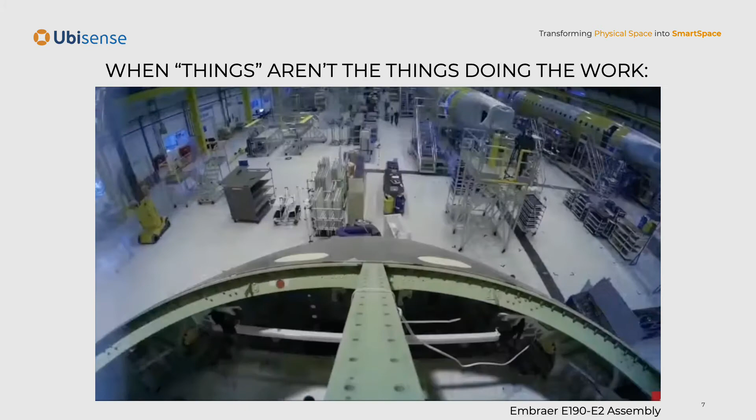But what I'm talking about here is: is IoT really going to revolutionize manual processes? So we look at manual processes and look at a situation where the things aren't the things doing the work. It kind of looks like this. This is the Embraer E190 assembly plant.

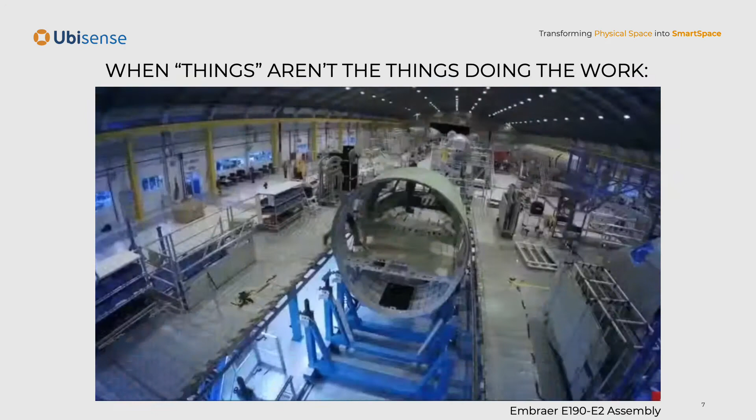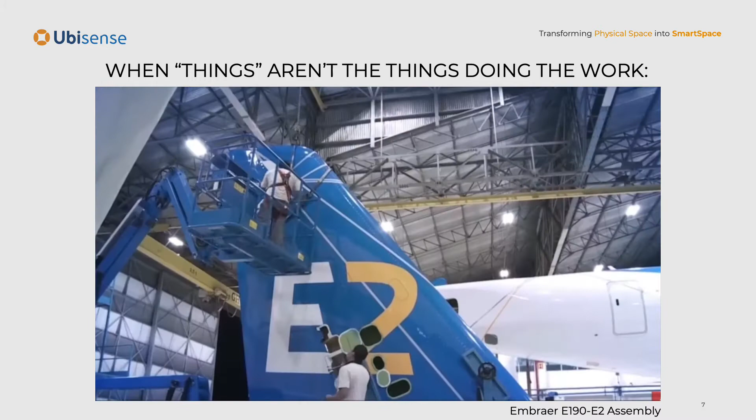And what is happening here is a lot of manual process, almost entirely manual process, including the guy driving the crane, right? There's a lot of movement, a lot of interaction, a lot of people. There are parts and tools and the product itself and the stands and just an inordinate number of moving parts that have to be synchronized in order for the process to work. And that's very different from an automated process.

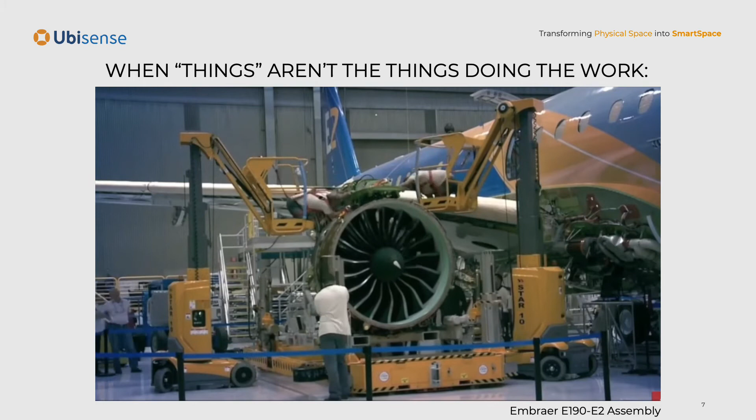So here, in a manual process, the status of your process is not defined by the aggregated state of the machines. There really aren't that many machines. The state of your process is defined by the complex series of physical movements and interactions of people and tools and parts and products. And IoT doesn't see that activity. That's where IoT is actually blind. And so IoT does not have what I defined earlier as sufficient understanding of manual processes. It just doesn't see all those important bits.

So if we have a look at a picture, you may actually have devices in your manual process that have some IoT connectivity. Your torque wrench may be feeding back torque results, and your forklift may be sending its state and state of battery charge and so forth. And whereas that's interesting, it doesn't define the entire process. The state of the battery on a forklift doesn't tell you whether it picked up the right load. Is it going to the right workstation? Is it taking the right route? Is it on time? All those things are about motion and interaction.

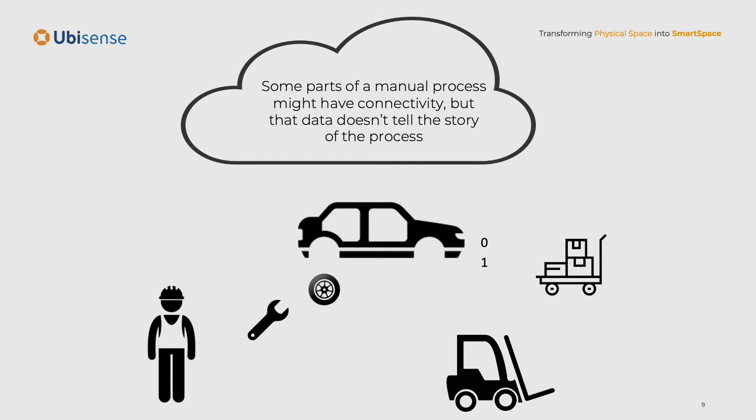And the reason is the process flow in manual process is really very complex and interconnected. Right? We're not moving through, let's say, a gear manufacturing process where we go through the grinding and hobbing and deburring and then heat treatment and then final finishing and polishing. That's a very linearized thing where everything happens inside the machine. In manual processes, we're talking about situations with a lot of interaction and moving parts, as I said before.

And that thing is called spatial intelligence. It's how you extend IoT into manual processes. If you think of the IoT as the Internet of Things, you have to add this Internet of interactions, effectively, the digitization of all those moving parts. And that can be done. And it's done in layers, and let me explain the layers.

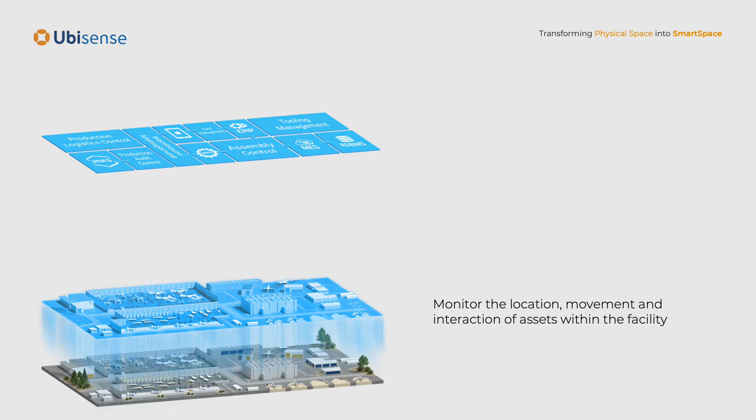So that's the first thing, location sensors, and there are a variety of different technologies that apply in different cases. But once you have that, it's a huge amount of data, way too much to really process yet. You go to the next level, which is to say, look, out of all that data, a lot of it's not very interesting, actually. Who cares about the location of a tool sitting on a bench? What I care about is a tool moving into a workspace or into a process zone in a product.

So the next level is to take all that data and turn it into events. And that requires a spatial model, and this is where we get into what I mean by spatial intelligence. Here we have to model the plant not in terms of objects and walls and conveyors, but here's a workspace and there's a workspace and here's a storage space and here's a kitting area and so on. So when we draw those geofences, we can pull out events like this product has just entered inspection cell 3. This part has just been delivered to dock door number 5. So those are events, those are the things we care about, and now we have a very structured set of data that is telling us what's going on in the process.

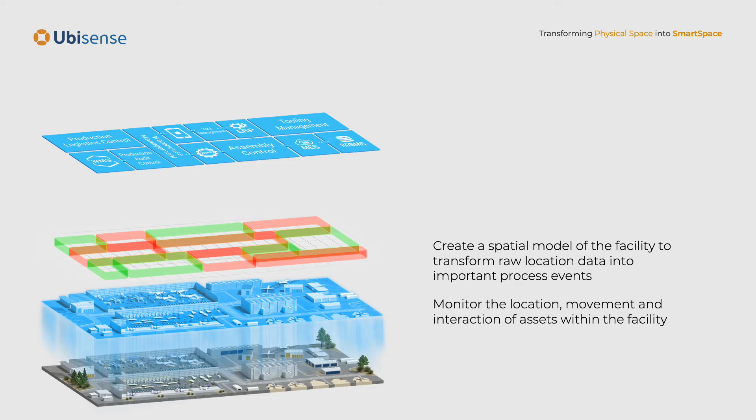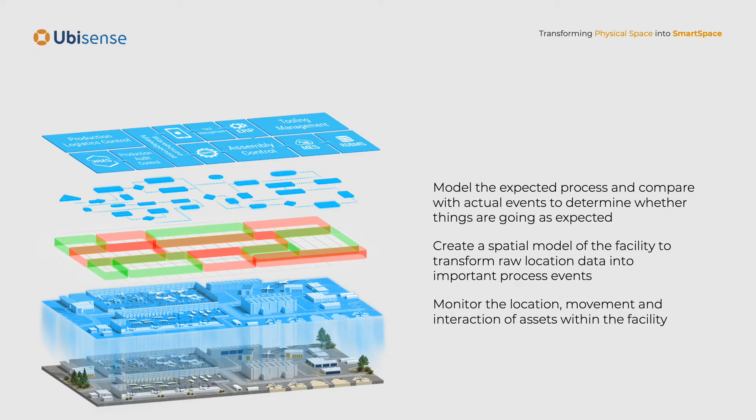In fact, what we've developed there is the spatial intelligence part of the system, but there's one more level which starts to add on top of that the true business value, and that is a logic layer which enables you to program this platform with what is our expectation, what's the plan, what does good process mean, what is supposed to happen. And with that model in there, comparing with the real-time events, you can start to detect issues and anomalies and communicate those up to the cyber part of our cyber physical system, the digital systems. And that allows our digital systems to get a view of what's going on, what's going wrong, and gives them the real-time ability to react and compensate for processes going off plan.

It also has digitized the entire process, and now that the processes are completely software defined, it also gives you a huge amount of flexibility in how those processes should run. So once you've been able to communicate those issues and errors up, that allows either digital systems, or more commonly people, managers and supervisors, the ability to intervene and correct. It keeps everything flowing exactly on plan.

And we've taken from the bottom this giant complexity of manual process, digitized it in the blue layer, in the next layer up, pulled out the important events that we care about, in the next layer up, monitored those events for which ones we really need to pay attention to, and then communicated up to the systems or people that can step in and make a difference. And that level in the middle there, those layers of digitizing the process and monitoring against plan, that is what I mean by spatial intelligence.

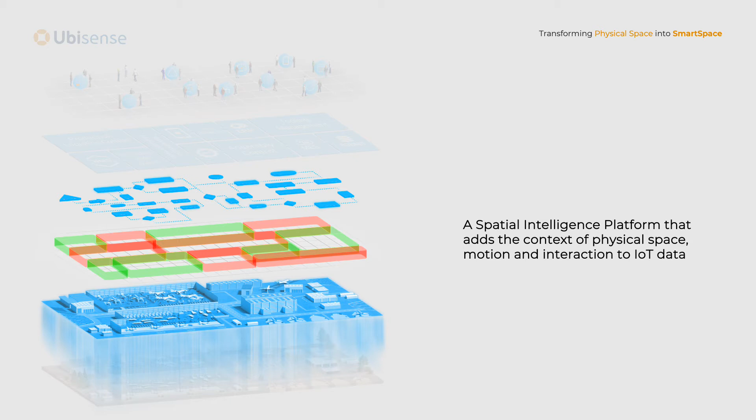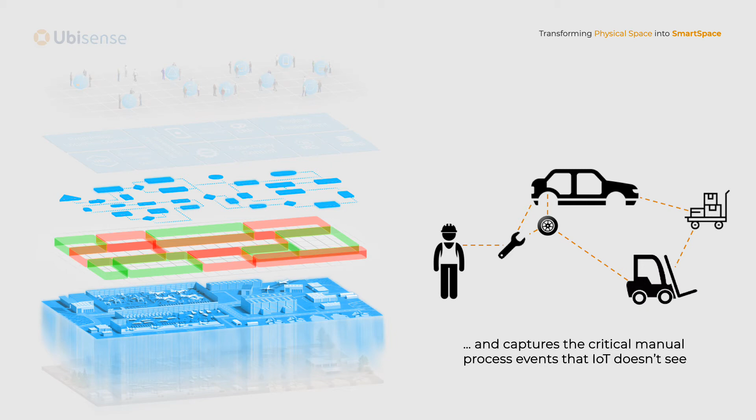And there is a software platform called a spatial intelligence platform that does this in the same way that IoT does for devices. IoT monitors the state and status of things, and a spatial intelligence platform measures the state and status of interactions and processes. And it captures those interactions that IoT doesn't see. So that fills in the missing blank, right? That is how you extend IoT into manual processes, is you add this spatial intelligence layer, and that illuminates and connects and digitizes those manual processes. So that's conceptually what it is. What does it do in practice?

I'm going to run through here some examples of actual use cases where spatial intelligence is making a difference. Before I do that, though, let's talk a little bit about categories of manual process errors, because really there are only 5 different common ways for manual processes to go wrong. There are probably a bazillion ways for an automatic process to go wrong, because there are many different ways a machine can fail. But in terms of manual processes, us doing things, there are really 5 categories.

So there are location errors, which are things being in the wrong place. And we're going to run through each of these here, and I'm going to give you some examples in practice. So things in the wrong place. You can probably think of tons of examples from your own experience where that has occurred. 2 or more things interacting that shouldn't be. That's an interaction error. There are count errors. Too few things or too many things in a certain place. And we'll talk about some of those examples.

Errors of duration. A task that's taken too long, hasn't taken long enough. Too long between tasks. And the final category is sequence, things happening in the wrong order. And I think it's possible to trace pretty much all manual process errors to one of these things. And you can see how none of these things are really visible to IoT, but how they become completely illuminated with spatial intelligence. So let's have a look first at the first category, which is the category of location errors, things in the wrong place.

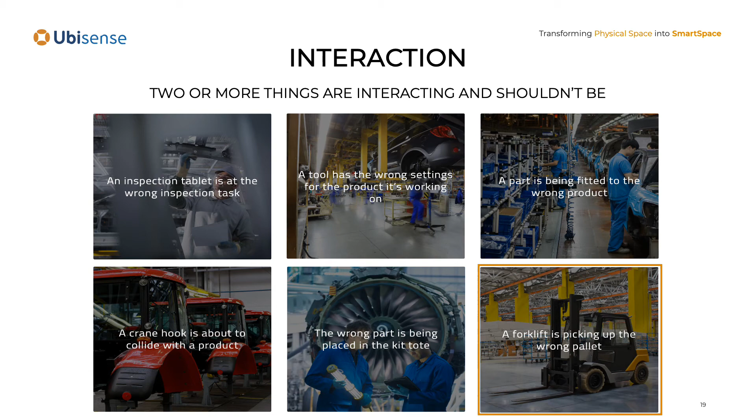And in fact, if I know the location of the forklift and the location of the pallets, and I know from the ERP, or maybe it comes through the MES in this case, which pallet it's supposed to be picking up, I immediately know when the forklift has picked up the wrong pallet, and I can tell the driver, put it back down, move one space to the left, that's the one you're supposed to be getting, and prevent that incorrect delivery. So once again, a very simple interaction example, very powerful.

So problems of count, too few or too many things. These are probably quite obvious in some cases and not in others. Let's continue our trend of starting by talking about tools. The number of fastenings that have been completed for a part. Let's say a cylinder head with 12 fasteners and only 11 have been completed. That is an undercount, and that is incorrect.

And we can count that by the movements of the tool. We can also, in that case, count it by the number of torque readings we've had, but can we guarantee that all those torques came from separate bolts? And the answer is no. You need to monitor the location of the tool to know that it's got 12 torques off 12 individual bolts. So that's kind of a micro view on location and spatial intelligence.

A bigger issue, a bigger physically sized issue, is a workstation being empty. That's a count of 0, where in an efficient plant maximizing throughput, all workstations would be filled at all times. And that sounds odd to people who are thinking about an automotive assembly line, but it's not odd at all if you think about non-linear processes, particularly in repair and rework, or an entirely non-linear manufacturing process, more like a low volume aerospace type of situation.

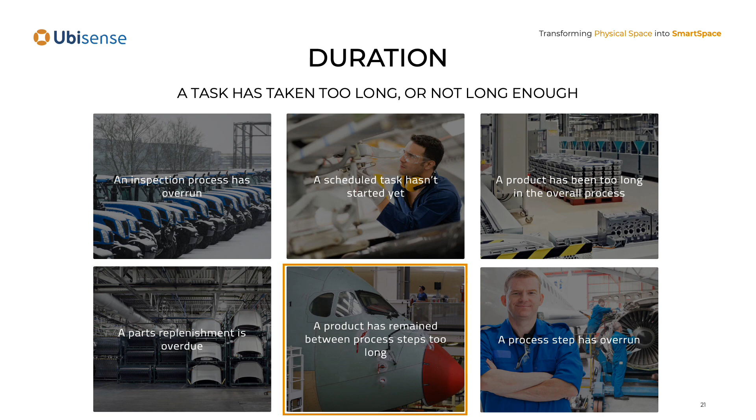So the final, and this is pretty straightforward and obvious, the final matter of sequence: are things happening in the right order? Tradition in these is to start with tools, so let's go back to the cylinder head and our 12 bolts, and maybe we know that the count was correct, but do we know they were done in the right sequence? There's a really important fastening sequence. It's a high pressure sealing surface. They need to be done right. And monitoring the location and movement of the tool from one step to the other, the sequence of events, is what tells you whether that was done correctly.

The logistics, staging parts kits in the right or wrong sequence, another sequence issue to worry about. And then, products repeating a process step. That happens quite often. Let's say the car goes through rolling road and it fails underbody inspection, it gets repaired, it comes back, it's supposed to go to underbody and it gets put back to rolling road by mistake when it's already passed. And that can cause, obviously, throughput issues as well. So all kinds of issues of sequence that we have to worry about too.

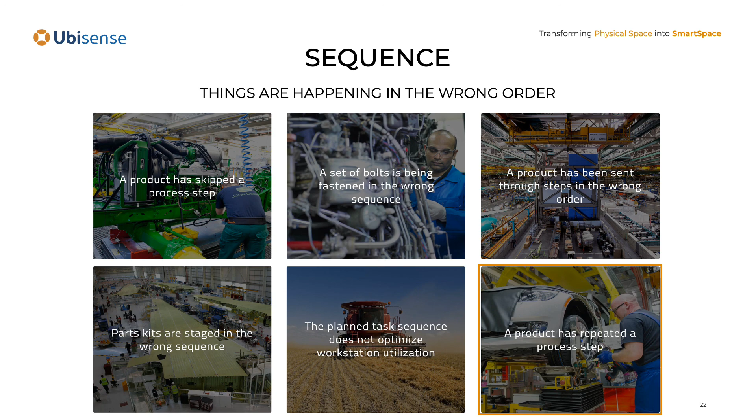So that's where I'm really coming from. Why won't IoT revolutionize manual assembly? Well, because it can't see manual assembly. The process is not described by the status of machines. And what IoT sees is the status of machines. It cannot see all the things that we just talked about. All those things are issues of interactions. It won't revolutionize manual assembly because it can't see the orange lines here. It can't see the counts and the durations and the interactions and the sequences and all of the things we just talked about, which are the bane of manual process efficiency.

And that is what you can do by adding this extra piece alongside IoT, this notion of spatial intelligence, which you can think of as adding to the Internet of Things this notion of the Internet of interactions, effectively. So that's why IoT won't revolutionize manual assembly. It just can't see it. Spatial intelligence platforms absolutely see into those processes, and that's how you digitize manual assembly, and that's how you reap all the benefits of IoT in those industries that have a high manual content.